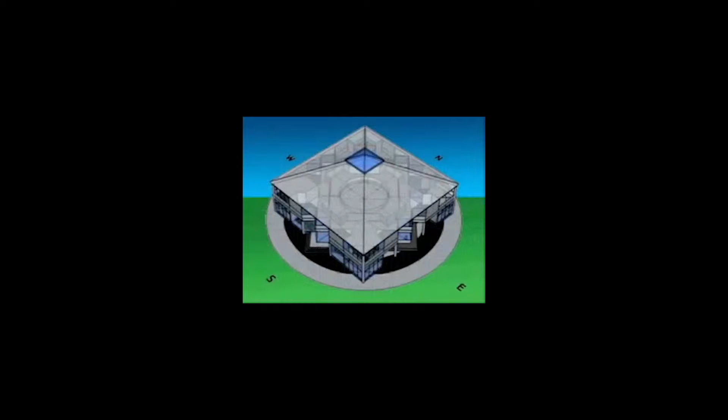In 1975, I was given inner promptings for the design of Morningstar. Since then, I've grown from experience as an architect, augmented by field research. 33 years after its conception, Morningstar is being upgraded to integrate the most advanced sustainable principles and practices. Its time has come to be built as a living environment and school of higher learning for leaders of the new millennium.

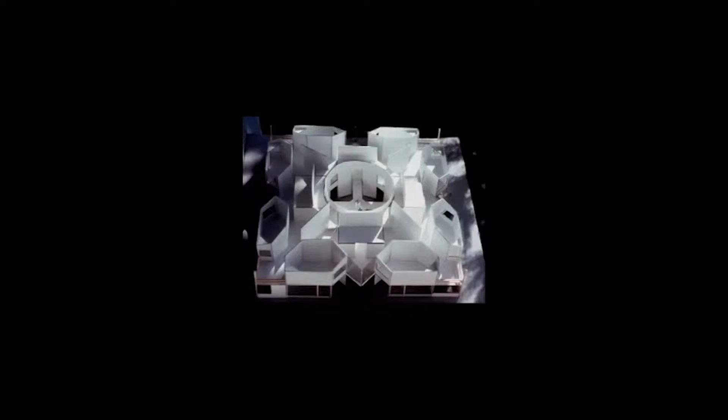The upper floor was conceived first and clearly reflects the sacred geometry of the whole. As above, so below is true here as well. The 4-square plan measures 80 feet along each side. The inside breadth of the walls measures 79.2 feet and reflects the mean diameter of the earth, the same number, 7,920 in miles.

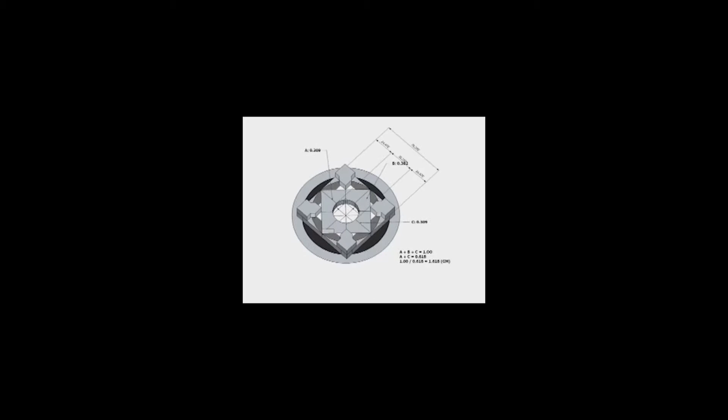If we consider the building diameter to represent unity, the number 1, and the spaces on either side of the rotunda to represent the golden mean proportion of unity, or 0.618, the diameter of the rotunda would be the remaining 0.382, which in proportion to the outside building diameter equals 30.25 feet. It represents the principle of unity, out-breath, the first breath after birth. The diameter of the rotunda reflects the golden section when considered as a void taken from the building diameter.

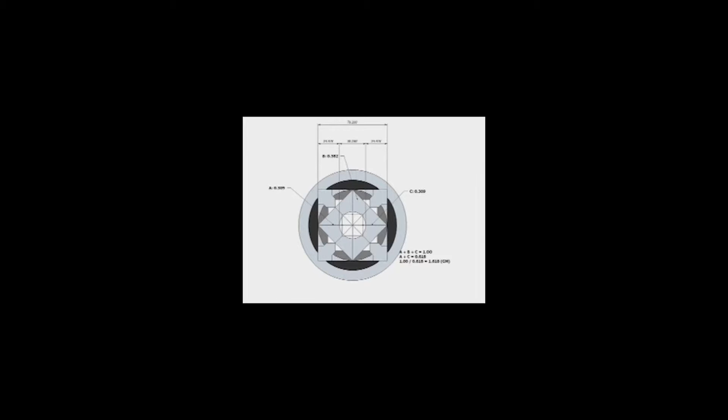Bridges above the ground floor connect the cardinal directions to the 4 residential quadrants. The intersection of the 2 bridges represents the reflexive self, the ability to discern and reason, to balance opposite poles, to contemplate the union of heaven and earth.

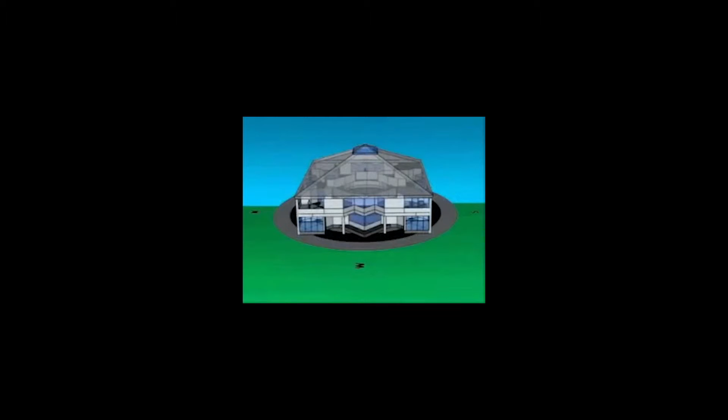A large skylight over the roof peak will provide optimum natural daylight in the rotunda and all surrounding spaces. Insulated shutters linked to photosensors will open and close like flower petals. 16 double bedrooms will provide comfortable sleeping accommodations for guests and a master teacher for each educational program of 3 to 5 days duration. Corner covered outdoor rooms will provide open space and freedom from the inner matrix.

The physical energy systems of the building will utilize the most appropriate forms of technology to minimize consumption and depletion of natural resources. As the foundation of the design, the building will be heated and cooled primarily by passive solar energy and natural daylighting. Solar greenhouses will provide isolated gain for solar heating as well as organic food and effluent treatment. Solar panels for electrical energy and hot water will be augmented by high-efficiency renewable resources to produce all of its energy on an annual basis for a net zero rating.

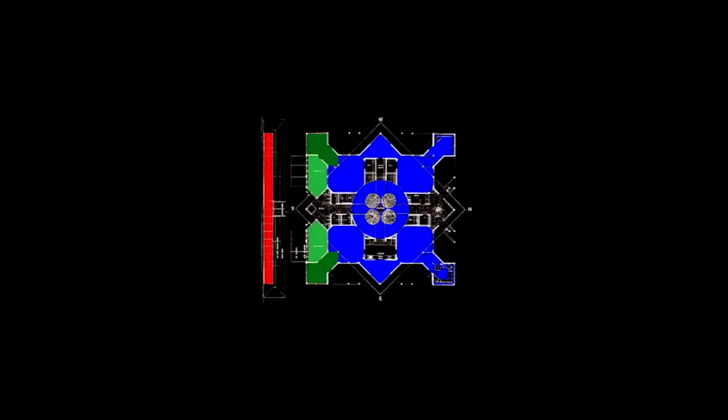Let's now go to the ground level. It provides activity spaces designed to support expanded awareness and enhanced development of human potential. Primary activity areas occupy the 4 building corners, including a lounge, dining room, art room, and computer room. Other spaces include music room, quiet space, and library. The rotunda provides the central space for gathering and celebration.

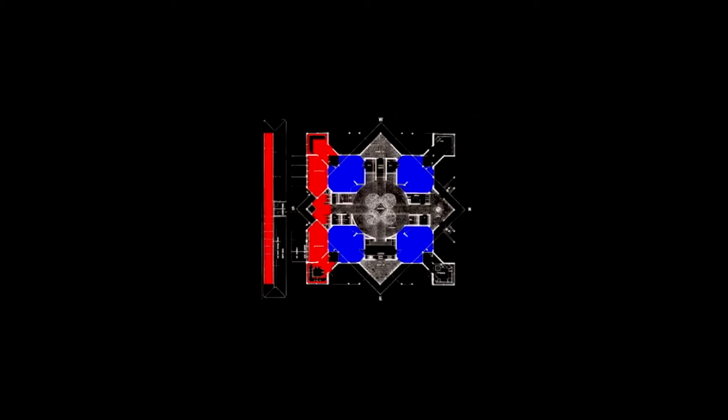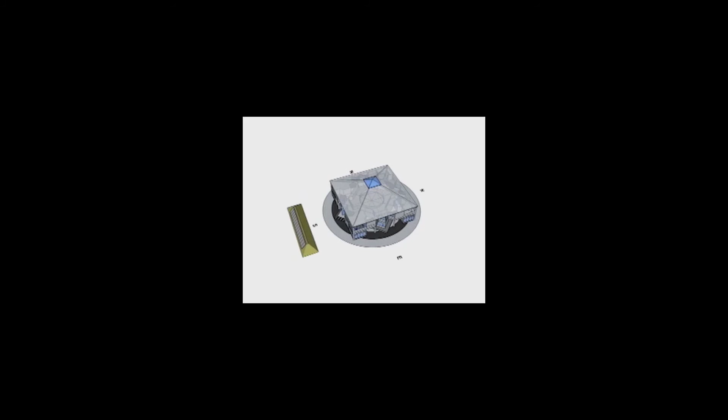In the time of the ancients, man, temple, and cosmos were seen as identical. Their canon of cosmology was embodied in their temple, their customs, their architecture. This contemporary design encompasses its own special qualities and purpose, and is conceived to serve very real and pressing needs in our time.

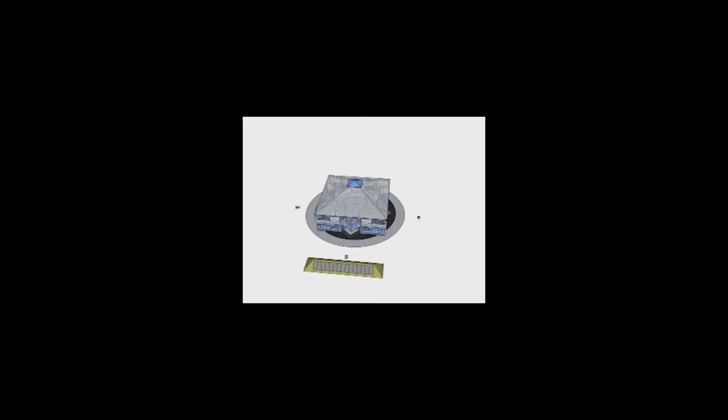Many of its features of sustainability and universal access have upgraded the original design, making it significantly more valuable. It's my hope that its timeless qualities, paired with the most appropriate sustainable strategies, will stimulate grassroots support to build the Morningstar Project and other endeavors of similar purpose as we evolve into the new millennium.